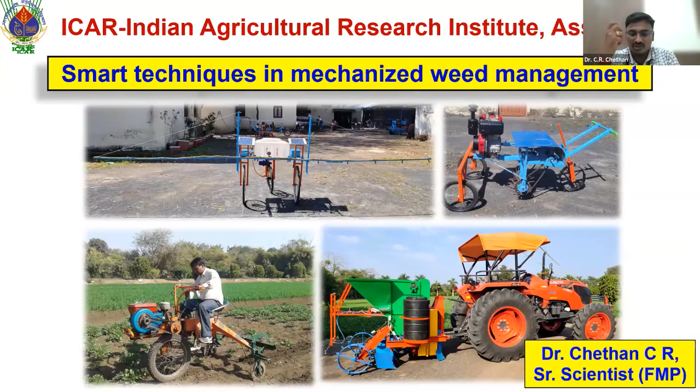Before that, I think by now everybody knows what weeds are and how they have a detrimental effect on crops, and how much losses are already occurring. This is just the introduction, which I'm not going to go over in detail, as I presume you already know what a weed is and how much loss it causes.

One particular point I want to highlight here: even after farmers use conventional and traditional weed management practices, they're still losing 15 to 16% of the yield. This is because of the inefficiency of existing weed management practices, as Indian farmers are totally depending upon manual weeding and conventional practices. Because of that, we are still seeing 15 to 16% crop yield losses. To overcome that, we have to move toward mechanized weed management.

If you look at weed management practices, there are biological, cultural, chemical, and mechanical methods. But from the perspective of mechanized weed management, there's one common thing: we use power, and we use tools and equipment to perform different operations through different methodologies. We use tractors, plows, plastic mulch layers, weeders, sprayers, aquatic weed harvesters. One machine or another is used in all these methodologies, and the kind of power we use is common across them.

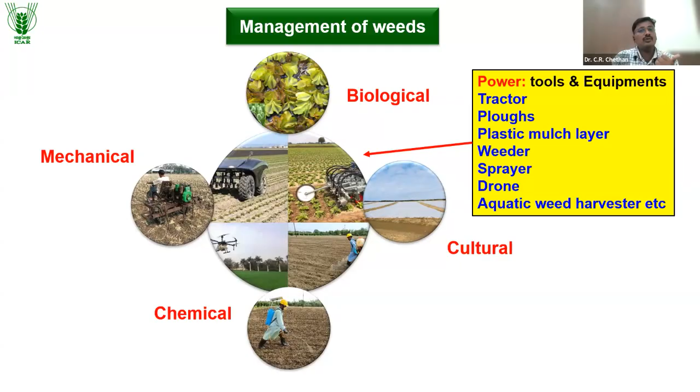So increasing the availability of farm power will automatically increase the mechanization level. We have to do that, then only we can effectively control weeds and increase profit. Before that, we should understand what mechanized weed management is. It means that to perform any operation we need power, and enhancing the availability of that power to perform weed management practices helps reduce operator drudgery and increase overall operational efficiency. That is called mechanized weed management.

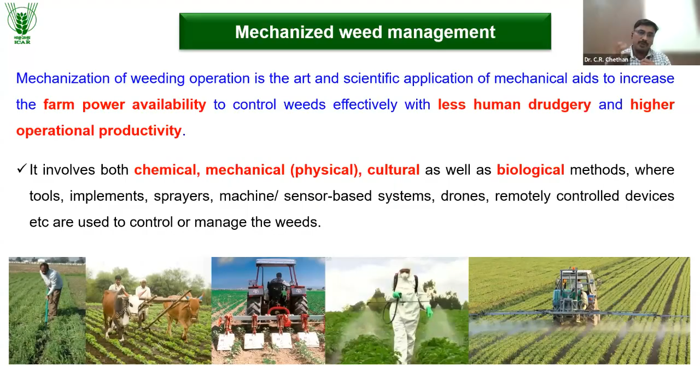It includes everything starting from the tractor to robots and drones, power weeders, sprayers, and everything. Wherever we use power, mechanization automatically comes into play.

If you look at the status of weed management practices in India, India is a totally agriculture-based country, and more than 49% of our population is involved with agriculture and allied sectors, out of which more than 63% of the farmers are women laborers. They are totally engaged in these kinds of weeding, sowing, or other agriculture-related operations.

And if it is the per capita availability, we have very, very less. 1.08 hectare per head, which is average.

But we have more than 86% of the farmers are small and marginal farmers. And if you see the average availability of land holding, they have just around 0.8 hectare per small and marginal farmer. It is very less compared to some developed nations and other countries. So adopting mechanized or advanced technology to this particular land and farmers is very difficult.

And we are facing the problem here, that is development of different kinds of advanced technology, adoption of advanced technology. So we have to come up with some proper solution so that the mechanization level can be increased.

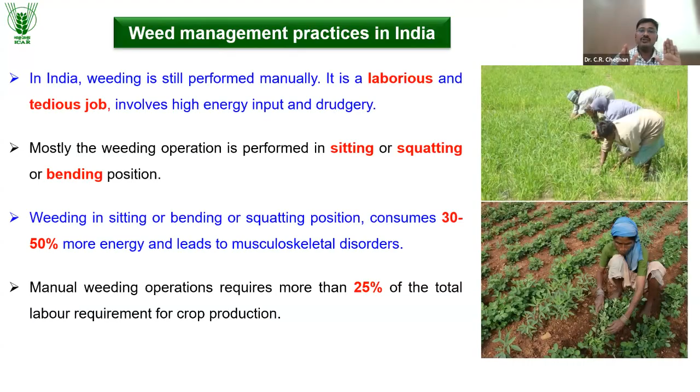And if you see in India, most of the weeding operations are totally done by manual operations, which is very laborious and tedious job. Particularly these operations are performed either in sitting, bending or squatting positions. Because of that, we are consuming more than 30 to 50% higher energy compared to performing any operation in the standing position.

So we have to avoid particularly the manual weeding, and we have to come up with some kind of mechanized operation. Then only we could be able to reduce this kind of drudgery.

And if we see the total labor engaged for weed management, it is almost 25% of the total labor required for crop production. We are going to consume that much for weeding only.

And if we see the mechanization level in India, the overall agricultural mechanization level is just only 47%, and we have only 3.045 kilowatt of power to perform any operations.

If we compare with USA, Brazil, or Russia, they have a huge amount of farm power availability to perform any operations. But in India, because of the economic condition of the farmer, fragmentation of lands, topographical limitations, and non-availability of machines, we have very less mechanization.

And if we come to mechanization in weed management, it is even less. We have just only 33%.

And if you see some of the major crops, in wheat, rice, and major cotton crop, somewhat it is okay, having 35 to 50% mechanization. But if we come to sorghum or pulses and oilseed, it is very low, 20% or less than 20%.

In those conditions, we are just adopting manual weed management practices. And if you see the data, for performing weeding operations manually, it takes around 500 to 600 man-hours per hectare. It is very huge.

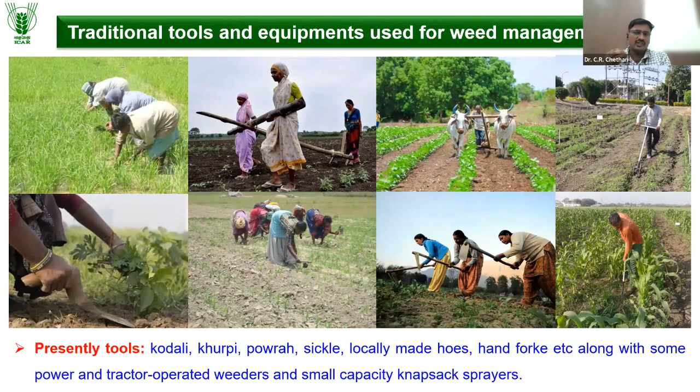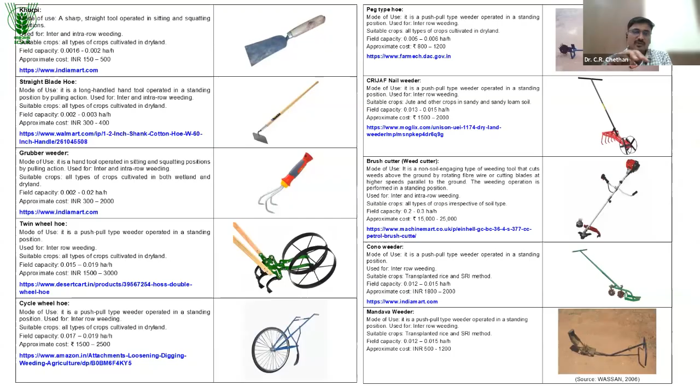These are some of the traditional, conventional methods of weed management practices presently practiced in India. We use kodali, khurpi, sickle, locally made hoes, and power weeders. But the problem is the adaptability of these machines to local suitability, which is a big question mark. And these are some of the weeders available in the local market.

But even then we have some research gap. The first research gap, in the sense, is why we couldn't adopt these kinds of advanced machinery in Indian conditions. First is the lack of awareness of mechanical tools. Farmers don't know which type of weeders are available locally or otherwise whether they are available at all. That is the first big question mark.

Second is the higher initial cost of the machine. Even though the machine is available to purchase, affordability of that particular machine for Indian farmers is very difficult. For example, we have more than 86% small and marginal farmers with less than 1 hectare of area, and their economic condition is very poor. And if they want to afford some advanced mechanical weeder, it costs a minimum of 30 to 50,000 rupees in the local market.

To tell the farmer to adopt that kind of weeder, it becomes problematic for him. Economically he couldn't afford it. So that is one of the main reasons it couldn't be adopted at the farmers' level. Then again, non-availability of the machine and fragmentation of the land. Because of the small land, we couldn't adopt the bigger machines.

Then the requirement of highly skilled labor to operate that particular weeder. That is also one thing. Then our rural landscape and migration of laborers from the agriculture sector to other sectors. These are some of the points hindering the adoption of highly mechanized weed management practices.

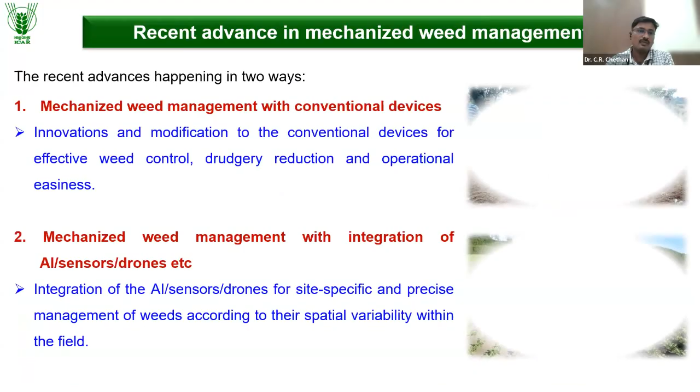So these are the kinds of perceptions the farmers have, and they're lacking suitable technology. So we have to come up with some kind of technology that can enhance the mechanization level at the small and marginal farmers' level. To do that, some work is already happening in India as well as at the global level. Mechanization is happening in two ways.

First, some innovations and modifications are being made to the existing weeders and sprayers. That is one thing. Another is the integration of robotics, sensors, drones, etc. for site-specific management of weeds. The main objective of both mechanization ways is reduction of operator drudgery, increasing overall efficiency, and precise management of weeds as well as precise application of inputs. That is the main motto of both.

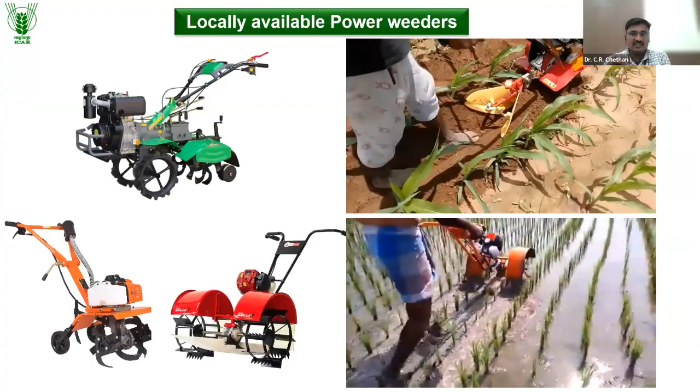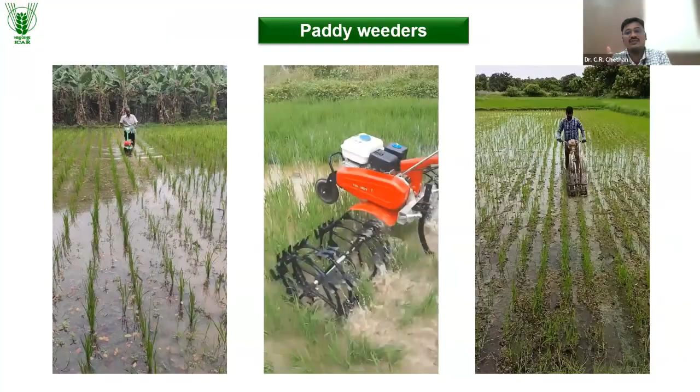So these are some of the weeders which are locally available. We have different kinds of power weeders, like petrol engine or diesel engine operated. Nowadays we are also getting battery operated ones. They can be used effectively under dryland as well as wetland conditions. But there is one problem: whenever we use this kind of machinery, the person has to walk behind these weeders.

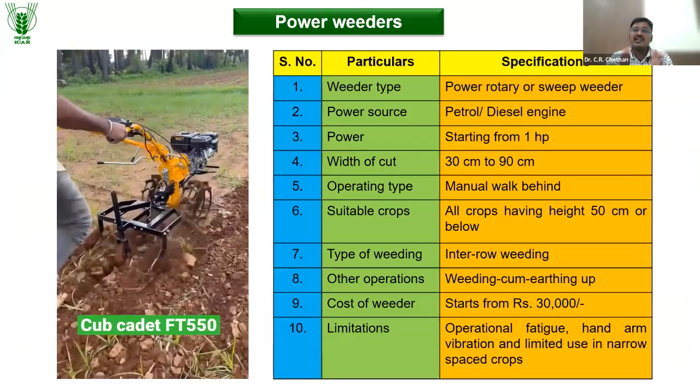For example, if a weeder has a 30 centimeter width of cut and the operator wants to perform the weeding operation for the entire 1 hectare area, he has to walk almost 33 to 35 kilometers per hectare. That is a huge amount, so much fatigue comes onto the operator. To reduce that, we have to come up with some kind of sitting arrangement like a tractor, some kind of mechanism so that this drudgery can be reduced.

To do that, at our directorate, we tried to develop low cost, ergo-refined riding type weeders. It has proper clearance to perform under different kinds of crops, as well as with different spacing.

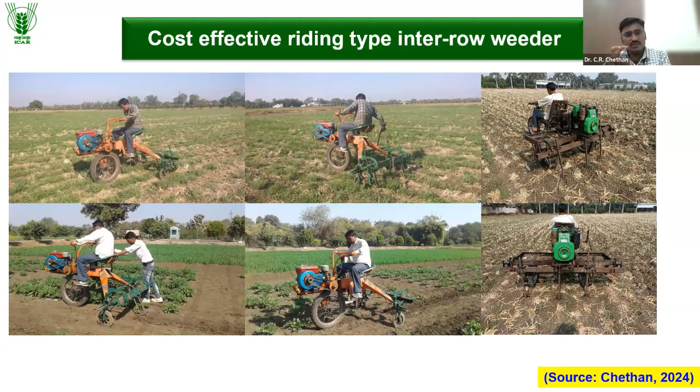One more thing is that for the existing locally available weeders, the minimum requirement for width of cut is 30 centimeters. Even if the row spacing is less than 30 centimeters, we see more crop damage, beyond the recommended level. So adopting those locally available weeders in narrow spaced crops is very, very difficult. In these conditions, we tried to solve this problem also: suitability of weeders to narrow spaced crops, as well as reduction of operator drudgery.

Under this, by using a diesel engine and some modifications to the existing weeders, we tried to develop a weeder that can be used under dry conditions for different crops with different spacing, starting from 20-25 centimeters to 30 centimeters.

What we developed is able to operate at more than 3 km per hour. It had very good weeding efficiency, more than 50%, with a field efficiency of more than 72%, and very good field capacity, that is, how much acreage is covered per hour. It is almost 0.29, equal to 0.3 hectare per hour that could be covered, and it had a very acceptable limit of crop damage.

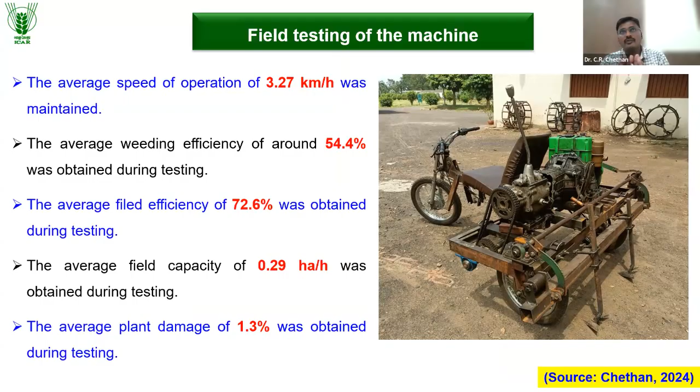That is around 1.3%. And we were able to develop this particular weeder at a cost of around 35,000 rupees only. So our main motto was the development of a weeder which could be afforded by all categories of farmers. Another thing, as I mentioned, more than 86% of the farmers are small and marginal farmers. Adoption of weeders with a higher initial cost is very, very difficult. So we thought to come up with some solution so that small and marginal farmers could also adopt these kinds of weeders.

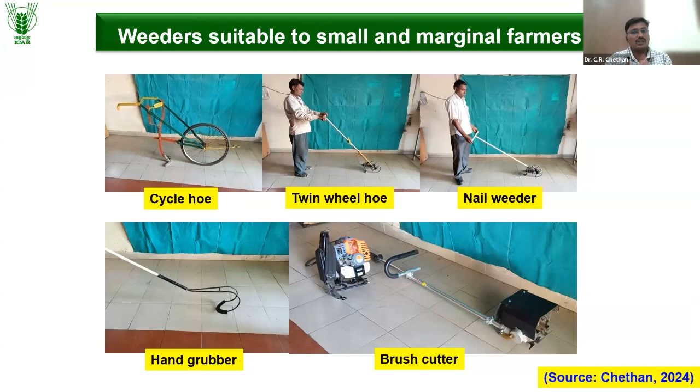We selected the existing popular manually operated weeders. Along with that, we selected one brush cutter weeder, which comes at a cost of 10 to 12,000 rupees only, with a weeding attachment. We tested it under sweet corn as well as some other crops. We observed that the brush cutter with weeding attachment performed very, very well.

It had a weeding efficiency of more than 80% also, and requires just around 20 man-hours per hectare. If we compare that value with others, hand weeding is almost 500 to 600 per hectare, and with other weeders it is almost 50 to 63 man-hours per hectare. So compared to that, it is very, very less. And the number of cobs and cob yield we obtained, green cobs, were almost at par.

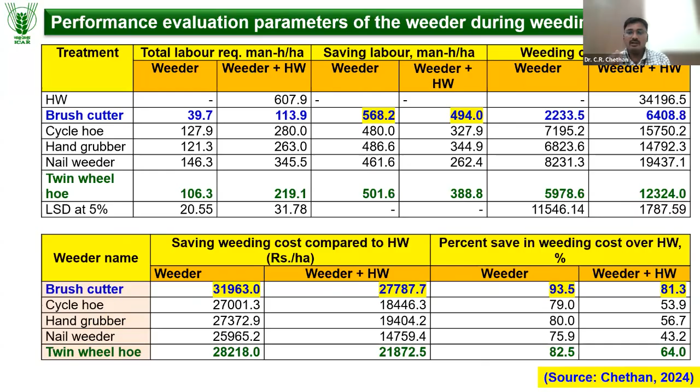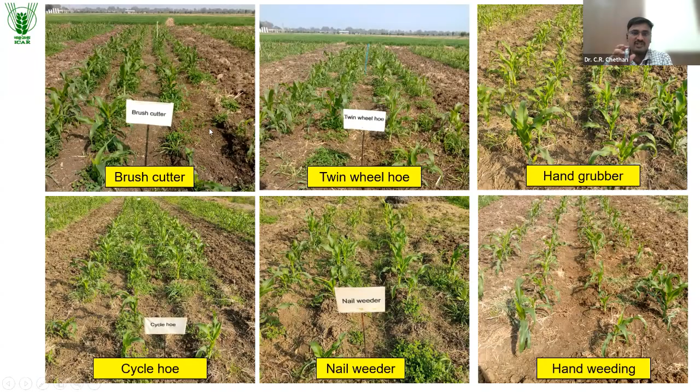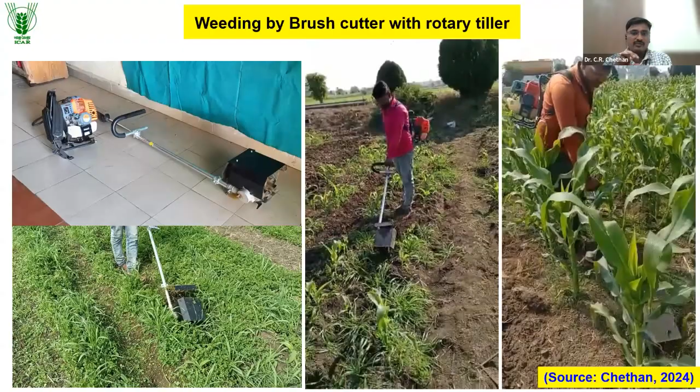The same brush cutter with attachment can be used under paddy, that is wetland condition also, and with some little modifications we can use it for narrow spacing also. This is the specification recommended for small and marginal farmers. The cost in the local market starts from 8,000 rupees, depending upon the power of the machine, and goes up to 20,000, with weeder attachments of 2,000 to 2,500 rupees.

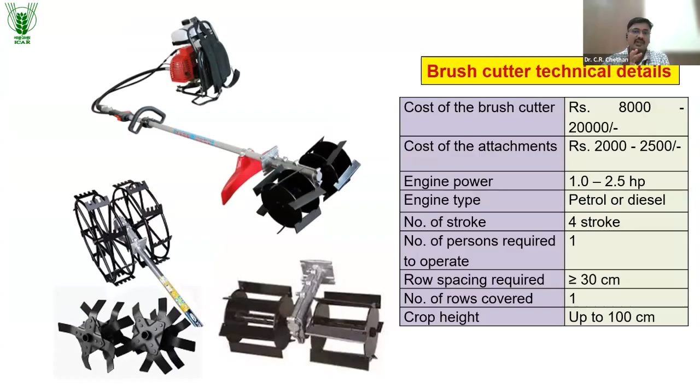By using that, small and marginal farmers will effectively perform mechanical weeding operations. But one more problem we observed is in black cotton soil and sticky soil conditions. When water is standing, we don't have any problem; we can use the weeders.

But if water is not there and the soil is sticky in nature, if I want to perform the weeding operations, it is very difficult because the sticky soil will automatically get clogged with the weeding element and it totally fails the mechanical weeding operations. If we wait for the optimum period for mechanical weeding operations, by that time there will be abundant growth of weeds. Because of that, we couldn't perform the mechanical weeding operations.

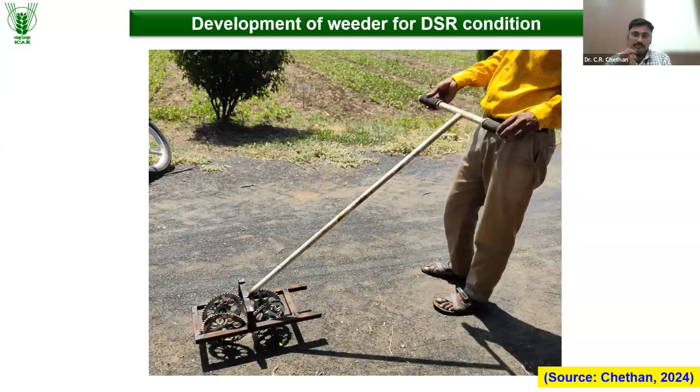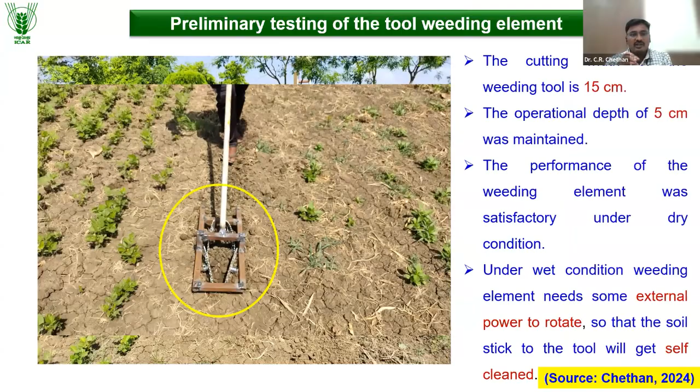To overcome these problems, we tried to develop a rotating weeding element-like structure for performing the weeding operations. Initially, we tried to develop manually operated weeders, and we used them under field conditions also. If it is at optimum moisture content, then it performs. If it goes beyond that, again it was getting clogged. To avoid that, we developed a power engine operated weeder.

What we did here is, instead of using rotary cutting blades like J type or L type, we just used a nail type structure. With that nail steel structure, because of the rotating action and centrifugal force, whatever soil sticks onto the weeding element automatically gets self-cleaned without any clogging, and operations can be performed. We just developed this particular weeder and it is under testing stage. Once it is approved, it will come to the market.

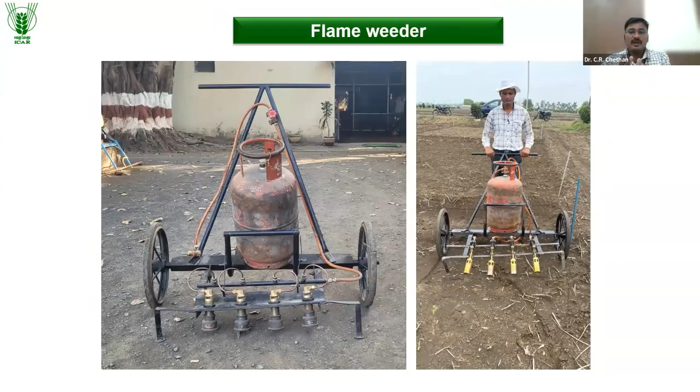Then in addition to this work, we also tried to develop the flame weeder. This we developed for our experimental purpose. For one of our experiments, we developed it using the LPG cylinder, and we tried to use it to perform the weeding operations. It was working very well.

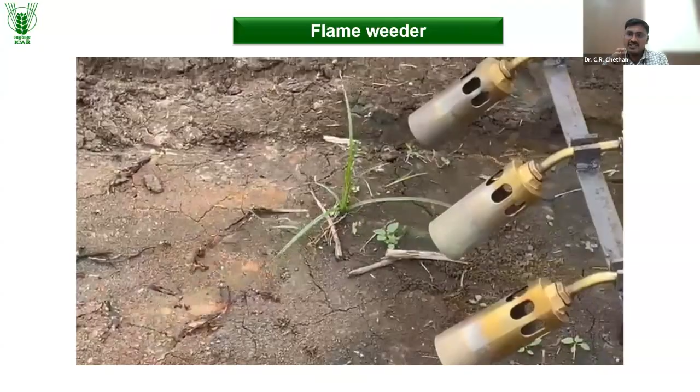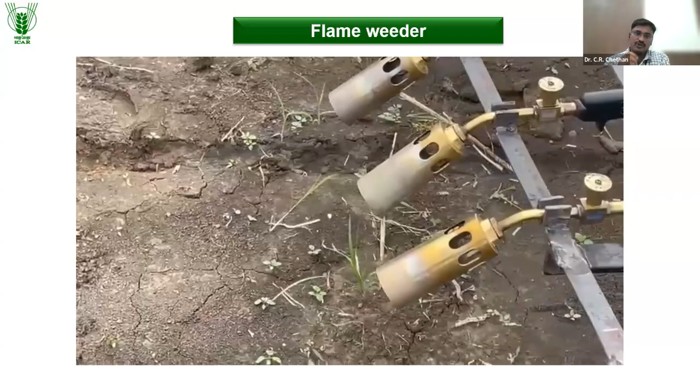The condition is that the soil should have the optimum moisture content, and the stage of the weed should be the initial stage, that is 3 to 4 leaf stage. If it is 3 to 4 leaf stage, then the efficiency of the flame weeder was higher. If the stage goes beyond, automatically the efficiency will get reduced. So we should be very careful while performing flame weeding.

Then we tried to develop a self-propelled weeding element. With the existing weeders we have, we need to give extra power to the weeding element to perform the weeding operations. Here, just using the forward motion of the tractor, the rotating element rotates itself and performs the weeding operations. We developed this self-propelling weeding element to perform inter-row weeding operations, and we tested it under the maize crop also.

More than 73% weeding efficiency we could observe. It was also working very well, and it doesn't require any extra element. With a cost of 1,000 to 1,500 rupees, that element can be developed and effectively used. The condition is that it should have the proper row spacing.

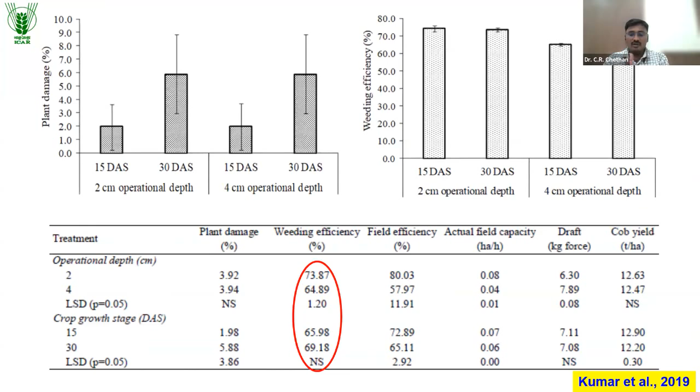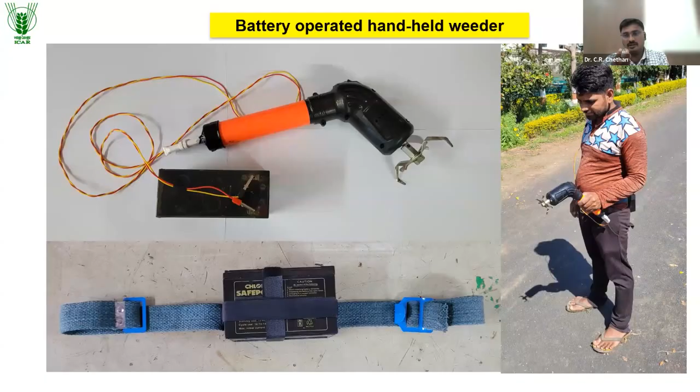Then for kitchen gardening purposes, we tried to develop a battery operated weeder, which can be easily worn by the operator to perform the weeding operations. It is under the development stage. This is just the initial stage of testing. So it is working up to 4 centimeter depth of soil. It is working very well, but further fine tuning and the final stage of development remain, and it will come soon.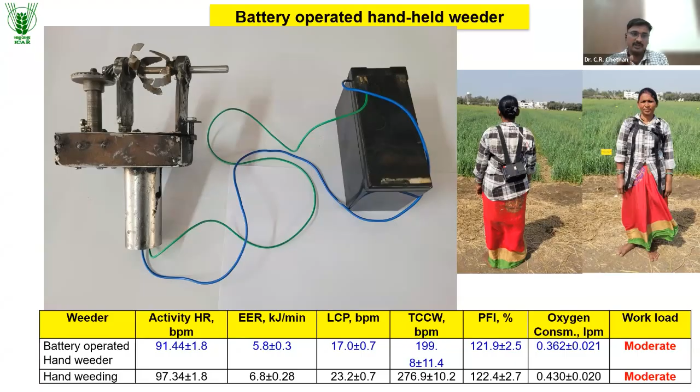We have tested this weeder for ergonomic suitability also, particularly concentrating on women farmers. It is consuming very little oxygen, the operation is considered very comfortable, and it can be easily worn to perform the weeding operations. It is best suited to kitchen gardening as well as for performing intra-row weeding. Whenever we perform inter-row weeding by weeders, we have to perform intra-row weeding manually. There we can effectively use this weeder.

Another thing is that at the mechanization level, we know that farmers are using different kinds of sprayers for application of herbicide. But usually farmers, because of the limited availability of resources as well as to complete covering larger areas, use the jet type nozzle for application of the herbicide. In the video, we can see how the farmer is using the jet type nozzle and performing the application of pre-emergence herbicide.

Because of that, it will be very difficult to obtain uniform application of the herbicide, and there may be chances of patches escaping, as well as multiple overlapping applications of herbicide. So there will be uneven application; there is no uniformity with these kinds of application.

To overcome this, to give a proper solution to the farmers, we tried to standardize some of the spraying techniques, giving some operational procedures. For example, instead of using a single nozzle, go with multiple nozzles, like a multi-nozzle boom structure. Hold the nozzle 50 centimeters above the targeted area and perform the spraying operation with the proper discharge rate of the nozzle and the proper speed, so that whatever area you are covering, even uneven land, can be easily covered and the herbicide can be applied uniformly.

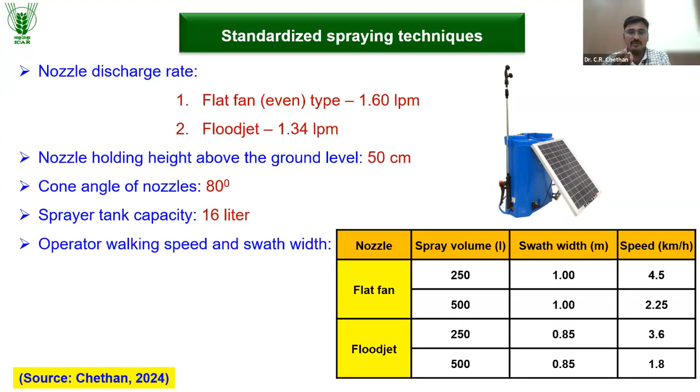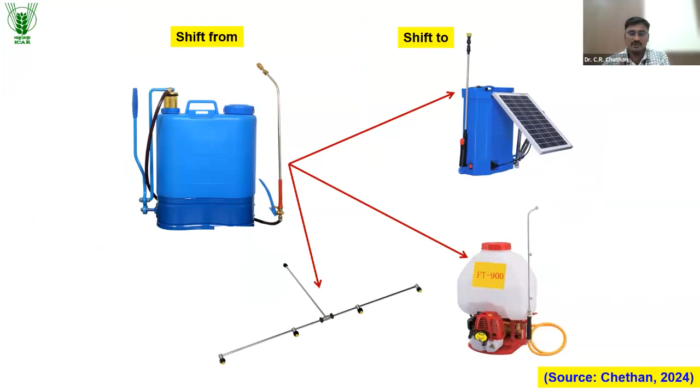So we tried to standardize the technique. We recommended, instead of going with a single nozzle, go for the multi-nozzle boom structure. By that, we were able to increase our operational field capacity from 58 to 100%, and we reduced the operational drudgery as well as cost by up to 50%.

Another thing is that whenever we sow the crop, if we are using a pre-emergence herbicide, we should apply it within 3 days after sowing. In the existing practice, we go in 2 phases: first sowing the crop, and after that applying the pre-emergence herbicide. Nowadays some mechanisms are coming with a pre-emergence herbicide application system along with the seed drill. By using that, we are able to perform both operations simultaneously.

For that, we tried to develop a sensor-based portable pre-emergence herbicide applicator, which can be easily mounted on existing seed drills and planters. With the machines that are newly coming, the farmers have to purchase a new machine. What we did here, we developed a portable system so that it can be easily mounted on the existing sprayers, planters and seeders.

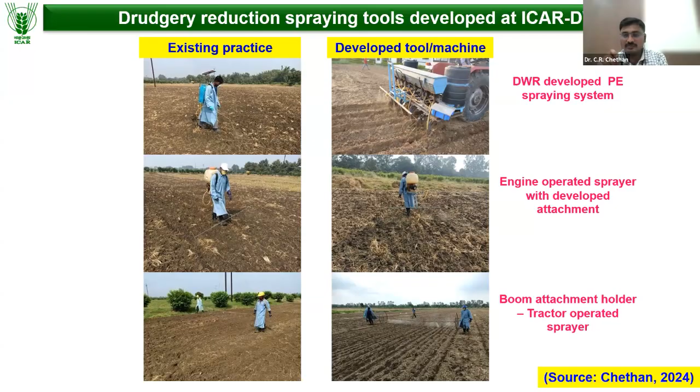Another thing is that whenever farmers use multi-nozzles, the operator has to constantly hold the boom and uniformly maintain the operation, which causes operational fatigue. To overcome that, we developed a mechanism. Here is the existing practice: a tractor-operated boom sprayer stands in one position, and using the spray hose pipe and nozzle boom, the operator holds it and walks through the entire field. In the video we can see that he is totally exposed to the applied herbicide, and it causes fatigue because he has to constantly hold the boom throughout the field.

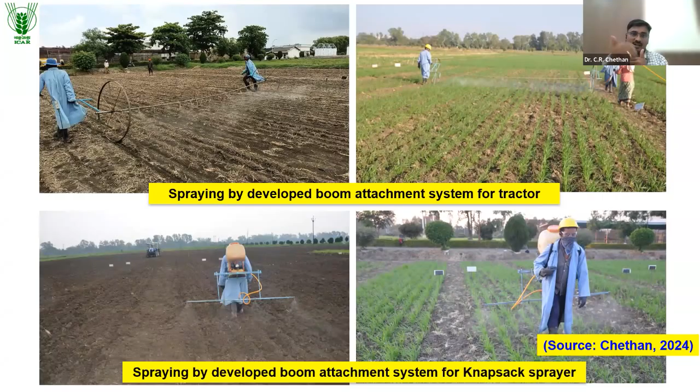In this situation, the operator is holding the boom while performing the spraying operation. Constantly holding the boom causes imbalance, wrist pain, and uneven application of the herbicide, as we can see in the video. So to overcome this problem, we developed a spray boom holding attachment for the tractor-operated sprayer as well as for the knapsack sprayer.

This is the attachment we developed, a wheel type structure. Using the wheel type structure, the entire nozzle boom can be easily placed on the wheel and the operation can be performed. It can be easily mounted like this.

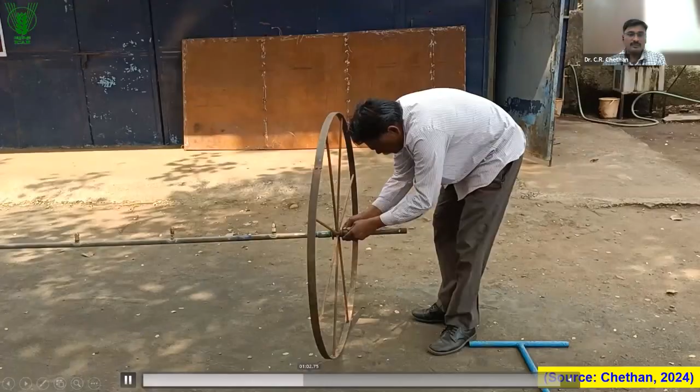This is the practical testing of it. We used it under different conditions, and it is working very fine. The operator just needs to push or pull the entire unit; no need to hold it and walk through the entire field. Because of this, almost 50% of the operational drudgery has been reduced.

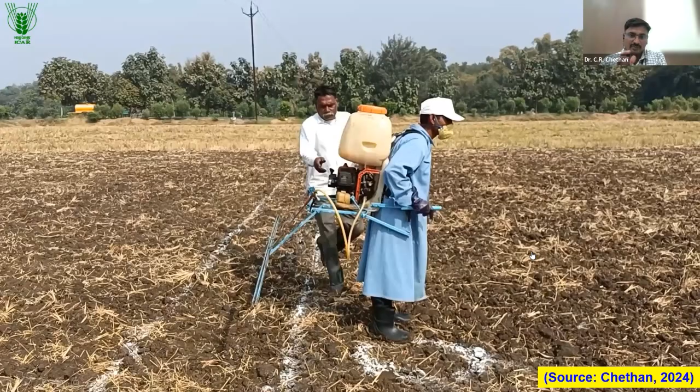And this is another type of structure which we developed for the knapsack sprayer, placing the entire boom behind the operator. So the chemical is applied behind the operator, the operator does not need to hold the boom in hand, and he is not directly exposed to the applied chemicals.

If we compare with the developed system, the operator is getting only around up to 3.2 kgs of force. That too, no need to hold it. He just has to push it or pull it, and from the ergonomic perspective, pushing and pulling force is recommended instead of holding the weight. So ergonomically it is suitable also, as well as our efficiency has been improved.

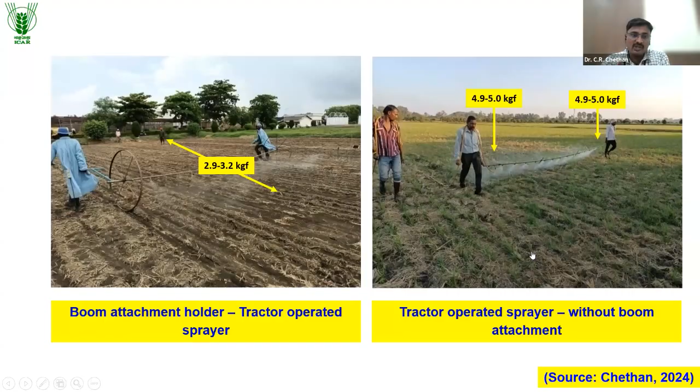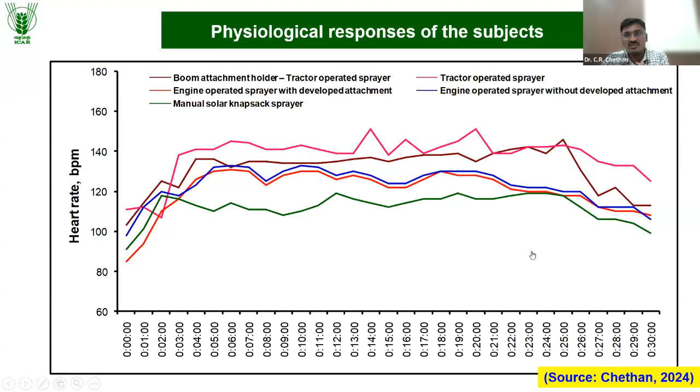And I have observed the physiological response of the subject by using different kinds of attachment. So what I'm getting is that it is ergonomically recommended, in the sense the operator is physiologically responding within the recommended limit. And we have tested different parameters also with different loads, that is using different amounts of water like 5 liter, 10 liter, 15 liter and 20 liter.

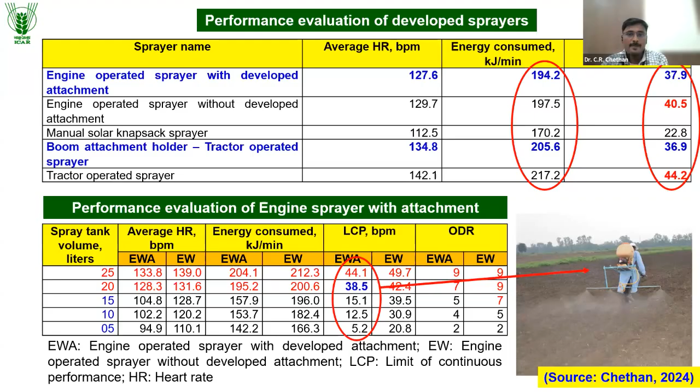With the developed attachment, we were able to use up to 20 liters without any operator fatigue. We could use it very easily. But if we don't use that particular developed attachment, the operator could only use up to 15 liters of spray volume. This technology has been applied for patent, and one of the technologies has been commercialized also.

And in addition to that, we tried to develop a tricycle boom sprayer, which is best suited to small and marginal farmers. Instead of using the tractor operated sprayer, we tried to develop this. It has an application width of almost 6 meters, which is equal to the tractor operated spraying system. It requires just 2 man-hours.

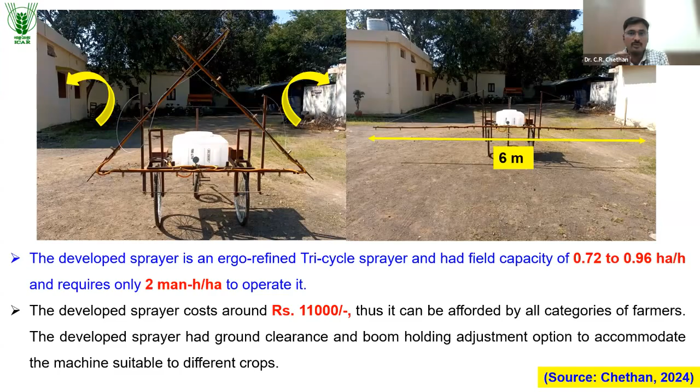Just 2 man-hours per hectare. If we compare that with the existing practices, we require almost 3 to 4 man-hours per hectare. So it is very, very effective. And at a cost of around 10 to 11,000 rupees, we were able to develop it. And we have tested it under different crops also. It is working very excellently.

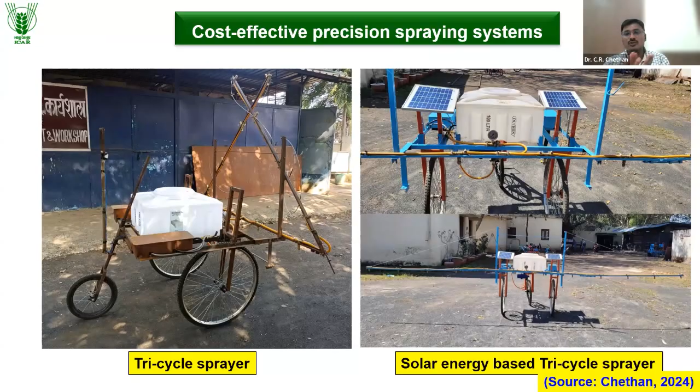And we upgraded the system into a solar operated system also. So we just installed the solar panel, and it could be used effectively. And we tried to optimize that particular spraying system for smaller quantities also. We tested it under different crops with different residue loads and with different cropping systems also.

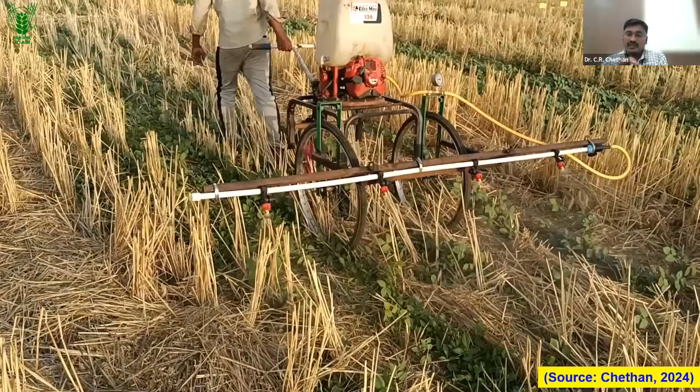So it is working very well, we achieved very good weed control efficiency from this one, with uniform spray. And we tested different nozzle orientation angles under different residue conditions to study the penetration of the spray particles. At 45-degree orientation angle, the spray penetration was very good, and we got very good weed control efficiency.

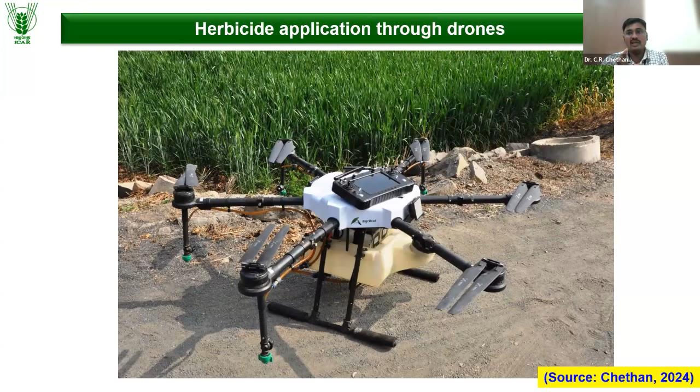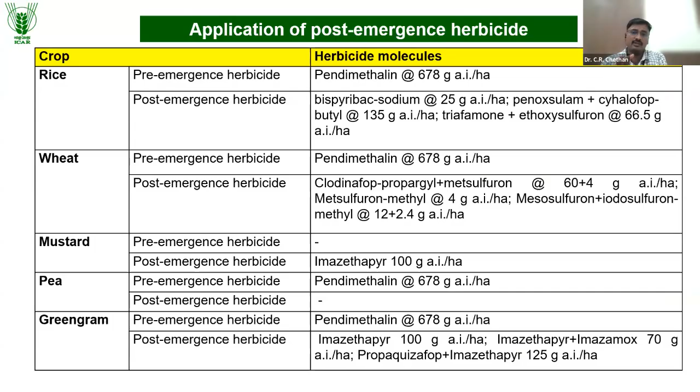Then, in addition to that, we tried to develop the standard operating procedure for herbicide application through drone. We have used a small category drone having 10 liters of capacity, and we have tested pre-emergence herbicide as well as post-emergence herbicide on different crops like rice, wheat, green gram, pea, and even mustard also. These are some of the herbicides which we have tested for the SOP. We are developing the SOP and analyzing the data, and very soon it is going to be ready. These are some of the highlights which we observed during our experiment.

If we operate the drone at 1.5 meter height with very low wind speed, that is 0.56 meter per second, drift is low. One of the major issues in drone-based spraying is drift, because of the wind velocity as well as the upward thrust. We observe turbulence of the spray droplets as well as drifting of the applied spray. So if we operate at 1.5 meter height at 0.56 wind speed, drift is very less. And this is for the application of pre-emergence herbicide.

For post-emergence herbicide, up to 2.5 meter operational height can be recommended. And we were able to save 89 to 92% of the water volume compared to the conventional system. And for labor and time, we were able to save around 69 to 88.5% by using the drones. And during the rainy season, when the window period is very small, the drone can be effectively used for application of herbicide.

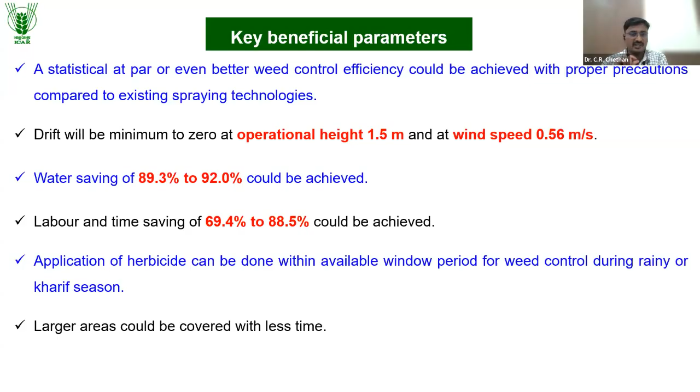Another thing is mechanized weed management with the integration of sensors. The integration of sensors is important because the appearance of weeds within the field is not uniform. We have spatial variability and heterogeneity, there will be patches. Simply applying any input like herbicide, or performing weeding operations without considering the spatial variability, will lead to huge losses.

To overcome that, site-specific management of weeds is very much needed. To achieve that, we integrate artificial intelligence with sensors. This will solve the purpose and allow very precise application of input, and we could achieve very good weed control efficiency.

Site-specific management is needed because if we follow it, spatial variability can be avoided. We could save around 50 to 80% of the herbicide, and 30 to 90% of the operational cost could be saved.

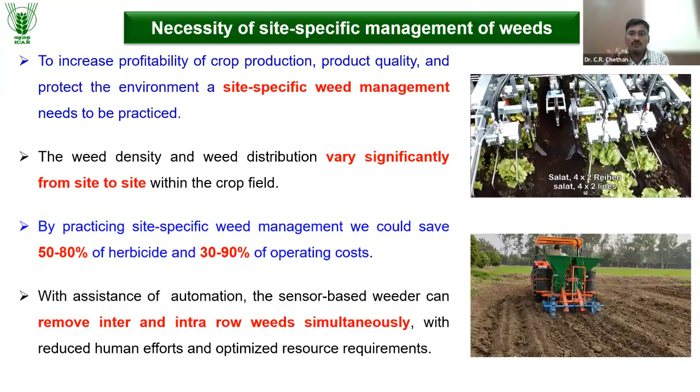In addition, there's controlling of intra-row weeds. For example, in a conventional weeding system, only inter-row weeding is performed. Very few options exist to perform intra-row weeding, and those are not that effective. But using this kind of sensor-based system, we could perform intra-row weeding also, along with inter-row weeding.

So one major thing in the sensor-based system is that we have to identify the weeds, then differentiate between crops and weeds, then perform the weed control option. To do that, we have two approaches: proximal sensing and airborne sensing.

Proximal sensing uses ground-based sensor systems like robots with a camera or ultrasonic sensors to identify the weeds. That is proximal sensing.

Another thing is airborne sensing. Airborne sensing uses aerial vehicles or satellite imagery remote sensing systems. Development of the weed map, identification of weeds and development of the weed map, that is airborne sensing. To do that, we use different kinds of sensors, like optical sensors.

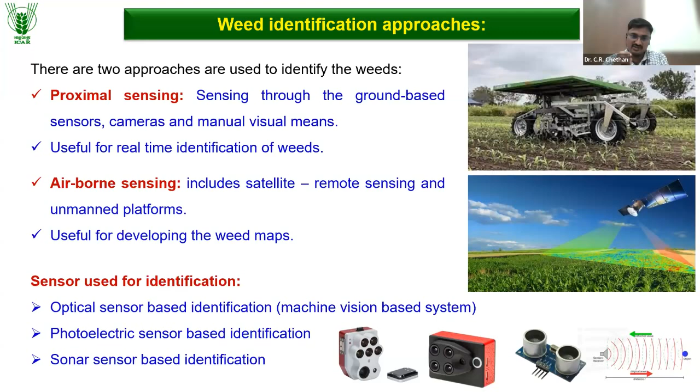In the optical sensor category, we use cameras - multispectral camera, hyperspectral camera, or even RGB camera. We also use photoelectric or sonar sensors, that is ultrasonic sensors, for detection of the object. These are some of the sensors we use for identification of weeds.

On the basis of that, we have two systems. One is the machine vision based system. This means using optical sensors to take images, identify weeds, and perform the weeding operations. That is a machine vision system.

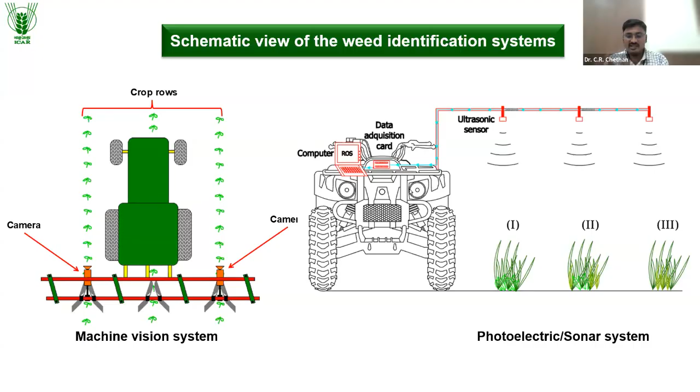Another one is the photoelectric or sonar sensor system, which identifies objects by emitting a signal that hits the object and comes back. By receiving that signal, we detect whether the object is there or not. Using this principle, we identify weeds and crops, then perform weeding operations or herbicide application. That is the other system.

This is just the conceptual view of the machine vision based system - taking a picture, identification, making a grid, and then deciding whether to apply herbicide or not. This is just the concept.

Based on this concept, in machine vision systems we have two approaches. One is based on weed biomass or weed density, using a variable rate herbicide application system that considers the vegetative indices of the weeds and alters the dose of herbicide application. This comes under the real-time approach. Within that real-time approach, we have identification of the weed and spot application of the herbicide, which also comes under real-time approaches.

Another approach is development of the weed identification map. First we develop the weed map using a remote sensing system. In addition to that weed map, we develop a prescription map - showing in which particular spot weeds are present, in what quantity the biomass is there, how we have to alter the doses, or where we have to apply the herbicide.

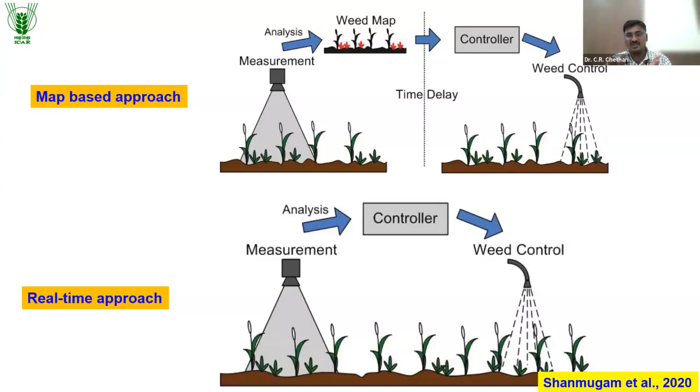Like that, we develop a prescription map, then we perform the operations. This is both the map-based approach and the real-time based approach.

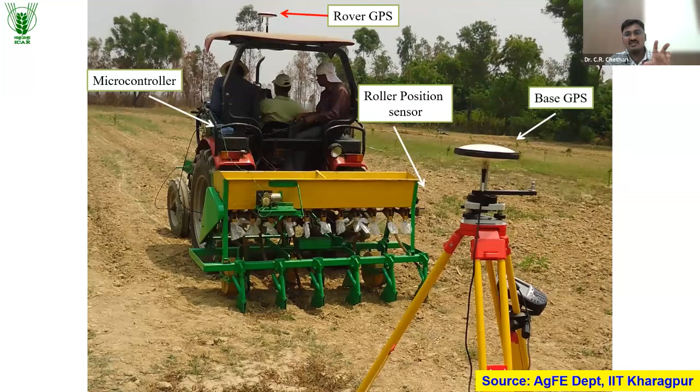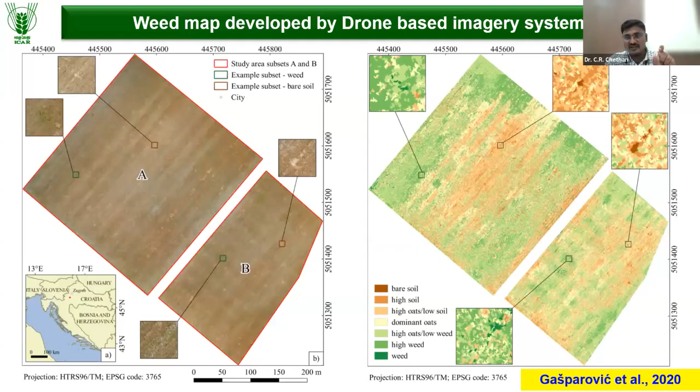This is the GPS-based system used for the map-based approaches. This is just a schematic view of how it will work, using remote sensing and all. We identify the spot, make a grid, identify the patches within the field, then develop a prescription map. After developing that prescription map, we feed it into the system, which automatically determines where the herbicide has to be applied.

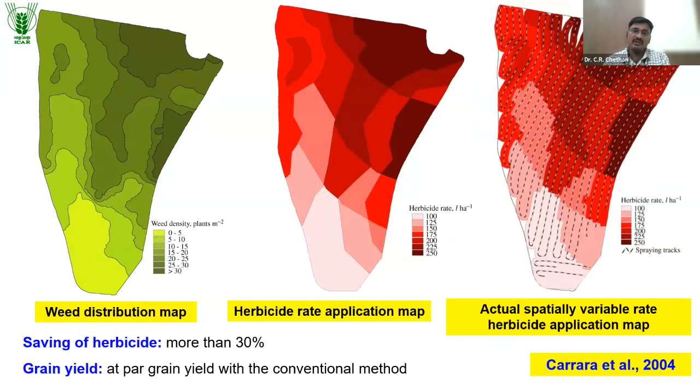By using this mechanism, we could achieve more than 30% reduction in herbicide application compared to the conventional method. This is environmentally friendly as well as cost friendly.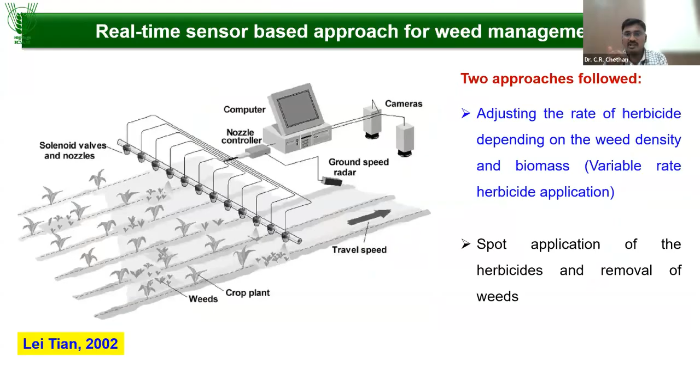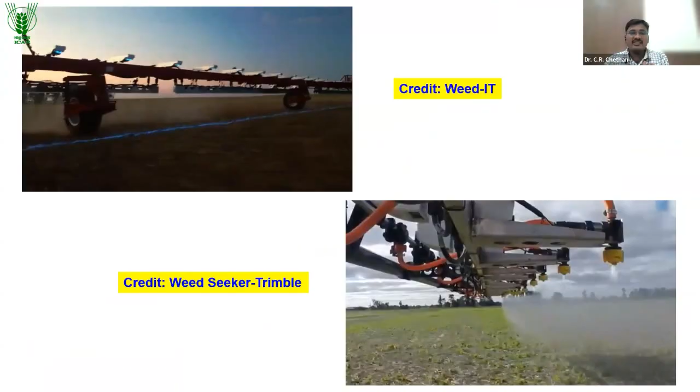In the real-time approach, there is spot application and variable rate technology. In variable rate technology, we use the vegetative indices of the plant and apply the herbicide accordingly. But it has the limitation that growth of the crop may affect the performance of the machine.

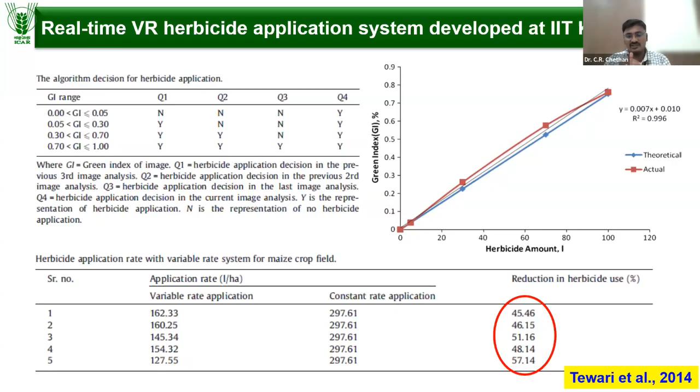On the basis of that concept, from IIT Kharagpur, I was part of this system. We tried to develop, based upon NDVI values, and alter the variable rate herbicide application system. By using this, we could reduce almost 57% of the herbicide, and it was working fine. The only problem was disturbances from light intensity. With proper precautions, we could achieve very good application efficiency.

The other thing is spot application of herbicide or removal of weeds, using the same concept of identifying the weeds and deciding whether to apply herbicide or remove the weeds. By using this treatment, up to 90% herbicide can be saved, and up to 80% of operational costs can also be reduced, and intra-row weeding can be effectively used.

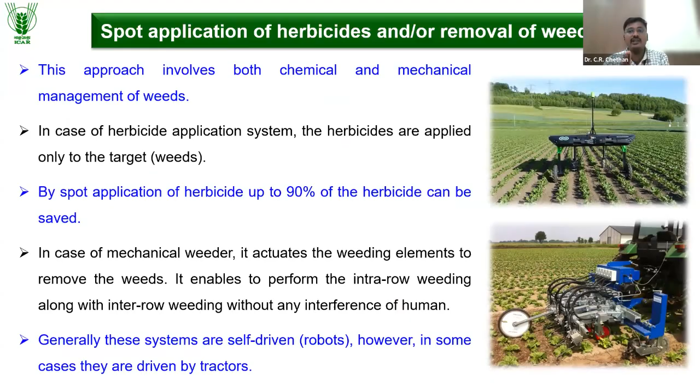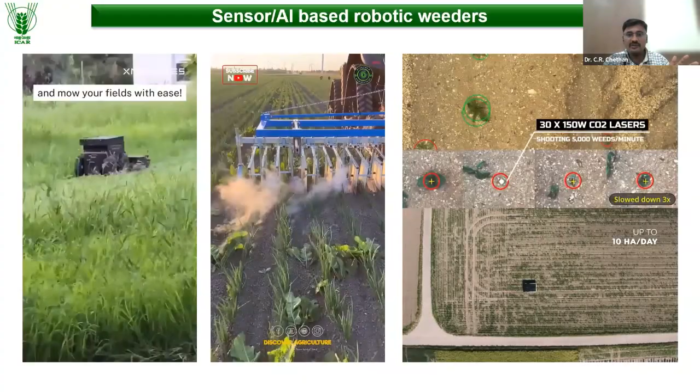So these are some of the systems which, using that particular concept, can be effectively used for performing weeding operations as well as application of herbicide. The first one is the robotic based weeder. The second is the electric weeder, using passing of electricity to kill particular cells of the plant. The third is a laser weeder, and spot application of herbicide is also there using the weed identification process.

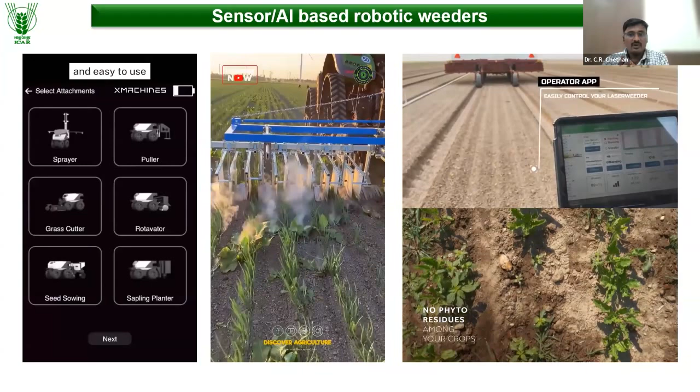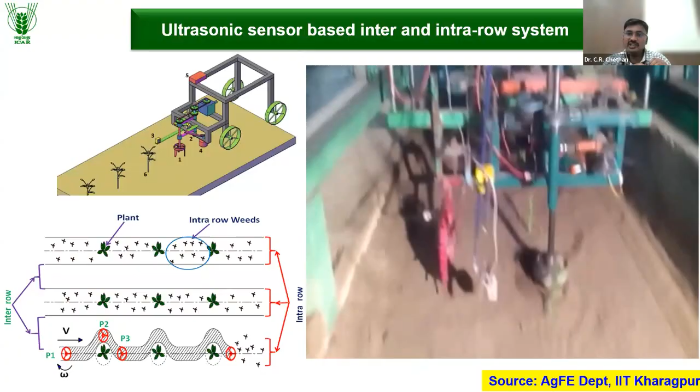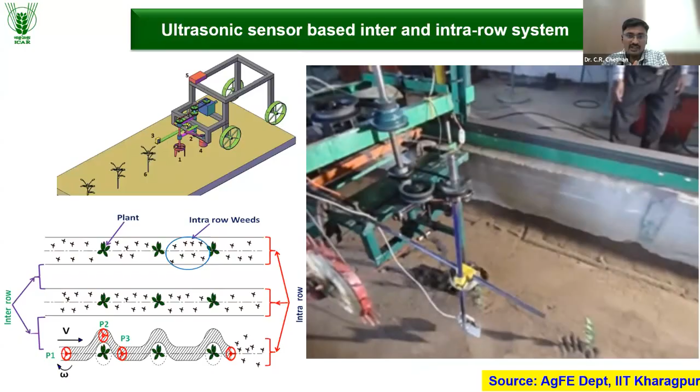One work we also did at IIT Kharagpur involved identification using an ultrasonic sensor, identifying the plant, assuming the plant height is above the weeds, and performing weeding operations. For this technology, we got a patent, and we performed under field conditions up to 87% efficiency with proper matching with the operational speed of the tractor.

We could achieve high weeding efficiency. That mechanical weeding efficiency was so high, but the only thing is that the height of the weed should be less than that of the crop. On the basis of that concept, we did it, and it was working fine also.

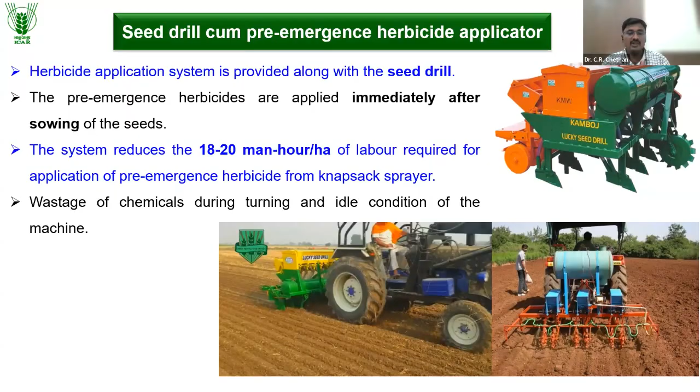Previously I mentioned that some existing seed drills and planters come along with pre-emergent herbicide application systems. Farmers who already have seed drills or planters would find it difficult if we told them to purchase a new sowing-cum-herbicide application system. So to give them a solution, we developed a portable system costing around 4,000 to 5,000 rupees, which just needs to be installed on existing seed drills and planters.

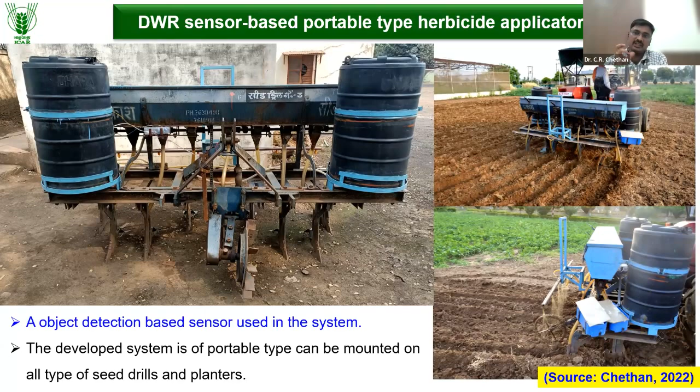By using that, it automatically cuts off whenever the sowing operation is done - only then is the herbicide applied. When sowing operation is not happening, automatically the spraying gets switched off. That mechanism worked very well. We mounted it on the existing conventional seed drill - while sowing, it applies the herbicide, and when sowing stops, the spraying automatically stops too.

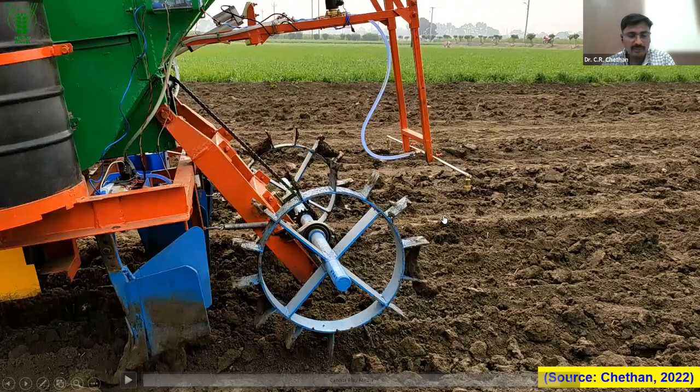I think it got stuck. We mounted the same. No, am I audible? Yes, continue now, sir. Okay, we'll continue.

We mounted the same mechanism. Actually, there is a disturbance with my internet connectivity, which got stuck. Okay.

We mounted the same portable mechanism system to the existing seed planter also. In that condition, it was working very well. Almost 22% of the herbicide was able to be reduced, along with operational cost.

We combined both operations, that is sowing operations as well as application of the pre-emergence herbicide. By that also we save time as well as around 1,000 rupees of operation cost. The entire system we developed costs just 5,000 rupees, which can be easily mounted to all the existing seed drills and planters.

There is no need to purchase a new seed drill or herbicide application system. So, at the end, this is just the conclusion: site-specific management of the weed and precise application of the herbicide is the need of the hour.

In India, we have large portions of small and marginal farmers. We should develop the technology mainly focused on small and marginal farmers, and we should develop ergonomically refined, low-cost technologies which are suitable to Indian farmers as well as other developing nations.

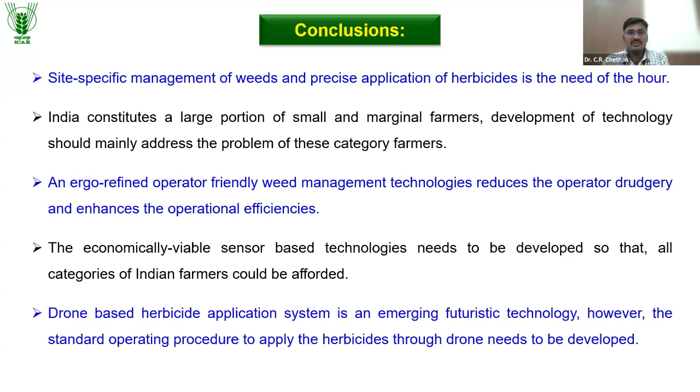So, these are all the points in the presentation, and thank you. If any questions are there, I will be happy to answer.

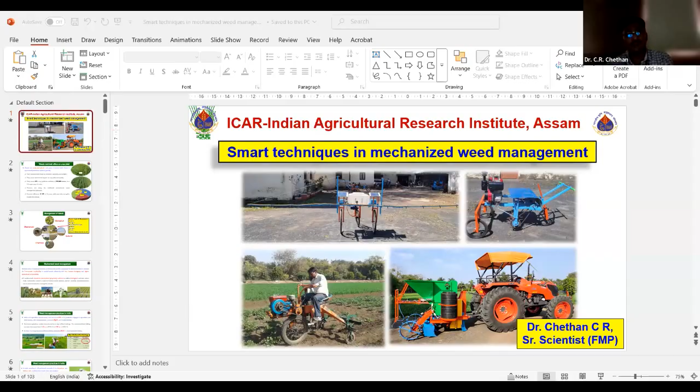That particular attachment is a portable type. Yes, the portable type herbicide applicator system which we have developed is operated by a battery. There are separate batteries, a 9 ampere 12-volt battery we used. We simply use one relay switch with the battery and a microcontroller. By the sensor we get the signal whether the object is there or not, and on that basis we operate it.

We can use the power of the tractor also. But the tractor has high voltage, and to reduce that voltage to use the microcontroller, it will take an extra part. So that's why instead we just use a simple UPS battery.